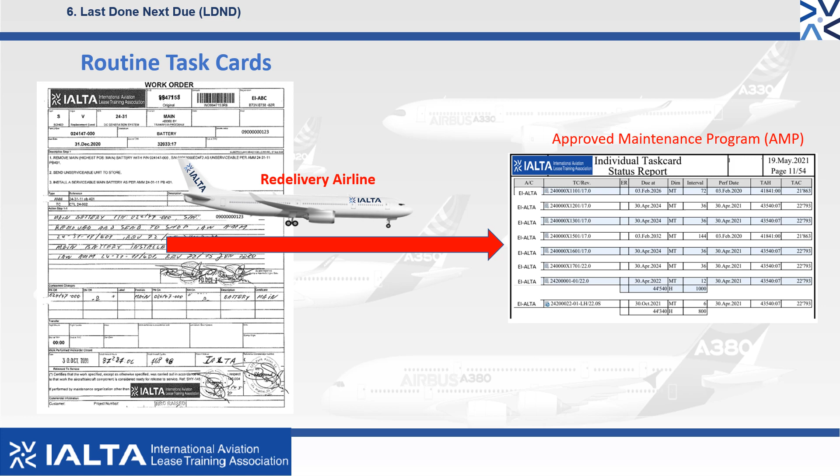Last done, next due refers to when the maintenance tasks were last performed as per the redelivery airline's AMP and when those tasks are next due to be performed.

A reminder from earlier in this video series that the OEM will govern the maintenance tasks and intervals at which they should be performed by means of the Maintenance Planning Document, or MPD.

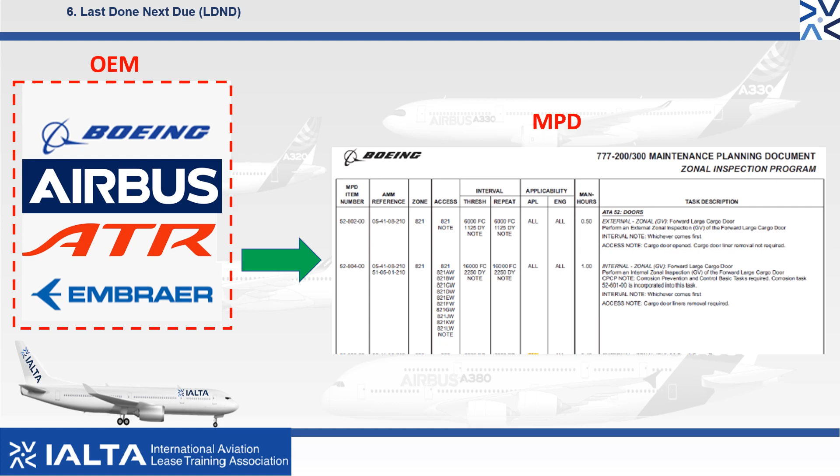Another reminder that the airline planning and engineering departments are responsible for the airworthiness of the aircraft and will monitor and control this by means of technical records.

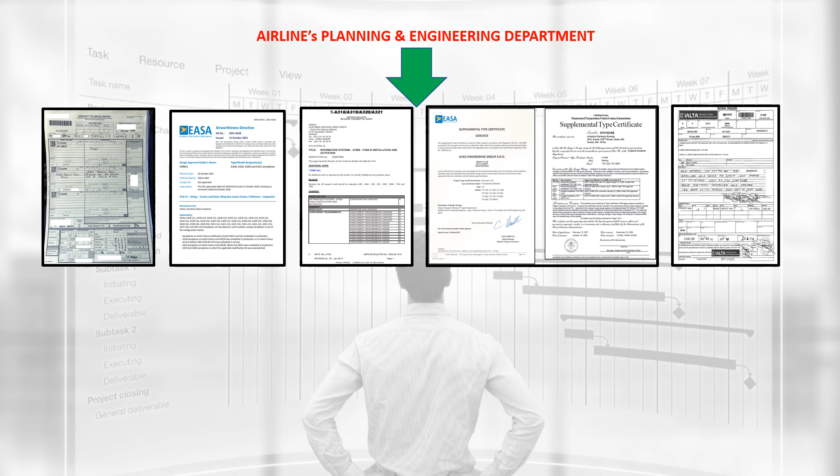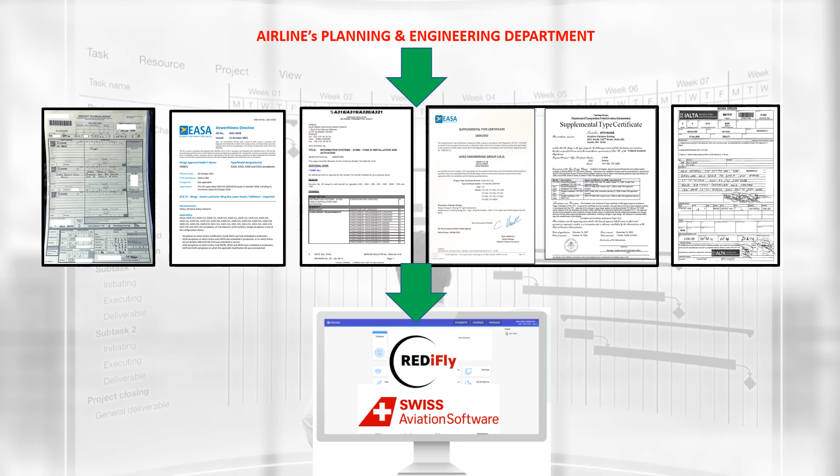Whenever maintenance, preventive maintenance, rebuilding, alteration work, including modifications or paint, occurs on an aircraft, the engines, landing gear, or any component, a technical records entry must be created.

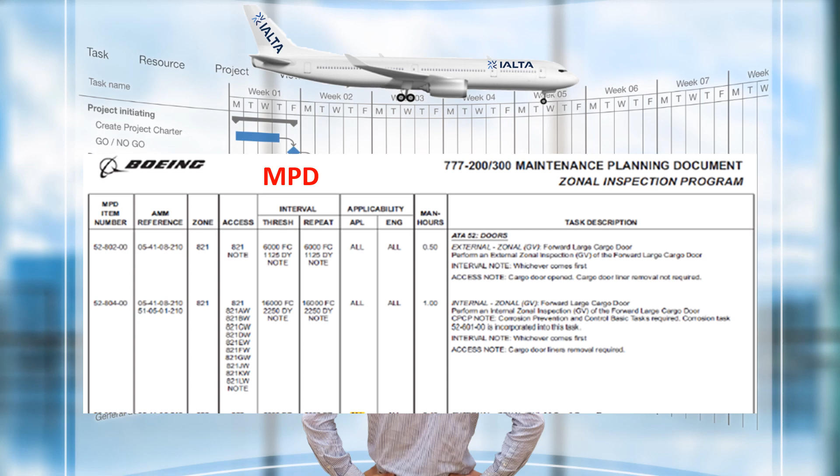The airline's planning and engineering departments will take the OEM's MPD and tailor it to their specific aircraft MSN. This document is known as the AMP, or Approved Maintenance Program.

The tasks are represented on a routine job card or routine task card, which is a work instruction for the maintenance engineers to perform the task.

The work to be performed will include inspections, servicing, testing, component changes, and system checks.

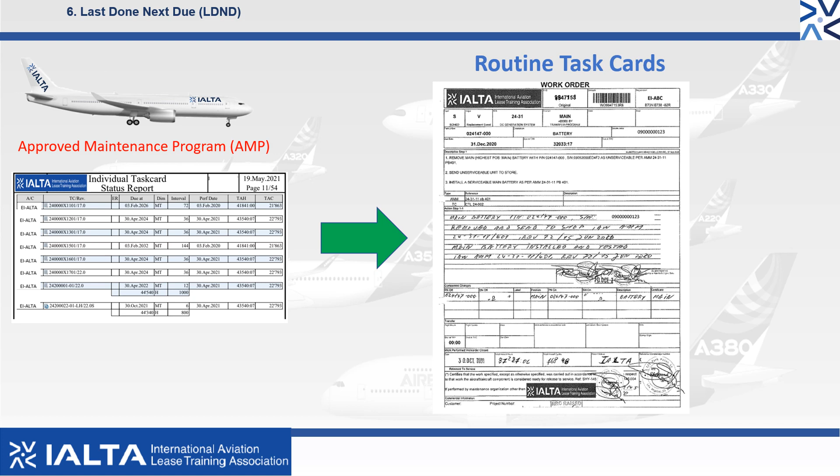Once the task is complete, the engineer will complete the paperwork and include the date, his certified number, and signature for sign-off. The acronym for the signed performed work is referred to in the aviation industry as the DFP, or Dirty Fingerprint, and the confirmation of DFPs is an integral part of all technical records reviews.

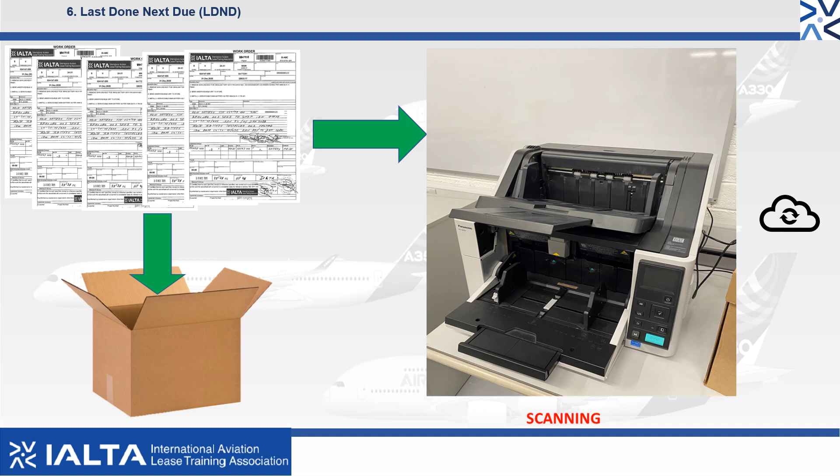The task cards are scanned and retained in soft copy, and the hard copies will be required at the end of lease for review. The MPD tasks are controlled at intervals of flight hours, flight cycles, and calendar time.

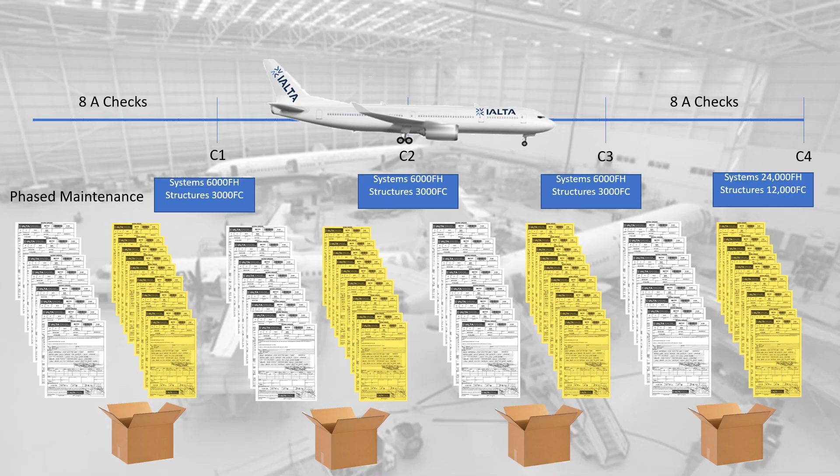Remember that for the bigger MRO maintenance checks, there will be a requirement to perform hundreds of inspections, tests, and servicing on the aircraft. The means of controlling this work is by use of routine task cards that will require the aircraft to be on the ground in a hangar for weeks at a time.

Any defects or findings will be controlled by means of non-routine card, or NRC.

The technical records consultant will perform a review of the last done, next due records. The high-level process involves extracting and becoming familiar with the relevant technical return conditions from the lease agreement,

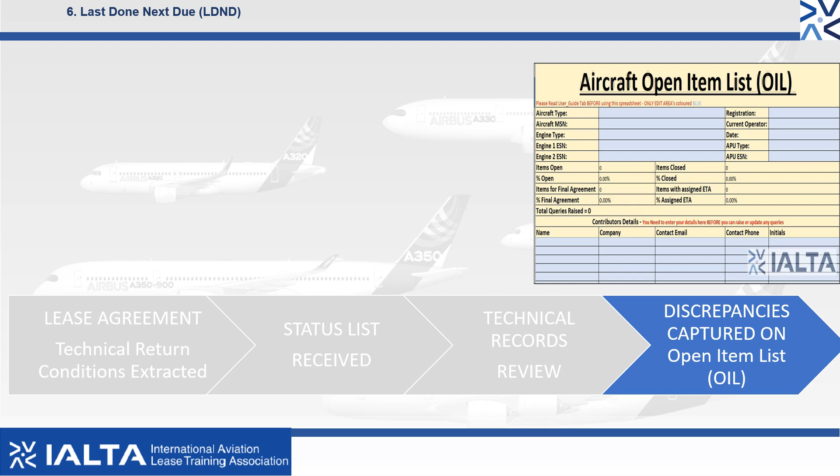receiving the certified status list from the returning airline, reviewing the technical records to ensure that all documents are present, ensuring that any issues or missing records are captured on the OIL and communicated with all stakeholders.

Along the headings, we can see the task number or MPD number, along with the task code, which details what we must do, and the intervals by which it is required, either in calendar days, flight hours, or flight cycles.

From the certified status list, we can see when the task was last done and when it is next due, again in days, hours, or cycles. Typically, you would expect to see the following in the report:

operator-specific maintenance tasks, system maintenance tasks, zonal maintenance tasks, structure maintenance tasks, certification maintenance requirements, soft life item listings, and sometimes may include structural repairs requiring repeat inspection.

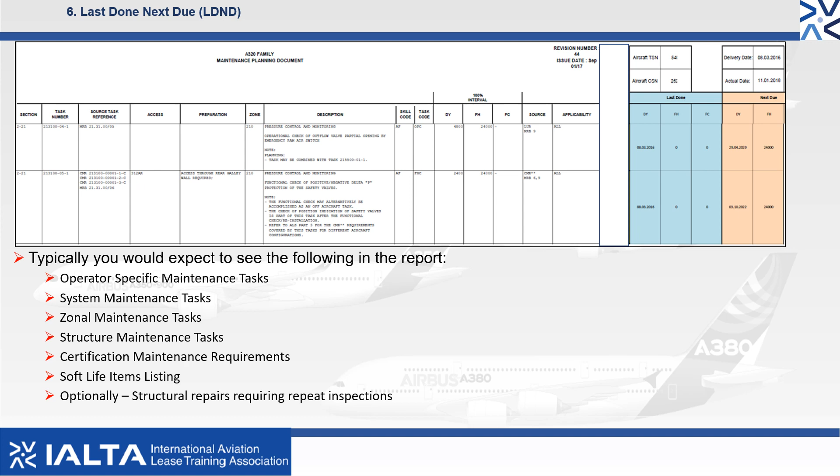Congratulations on completing the video on last done, next due technical records. The next video is an introduction to Airworthiness Directives, AD, and Service Bulletin, SB, technical record reviews at the end of lease.